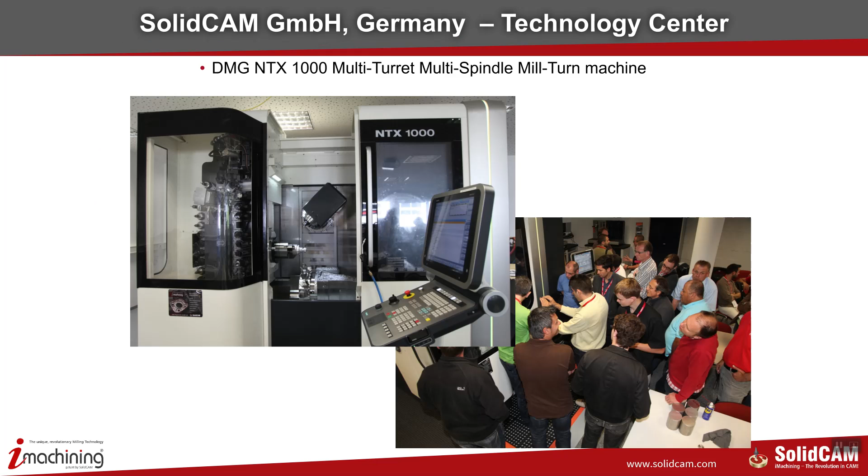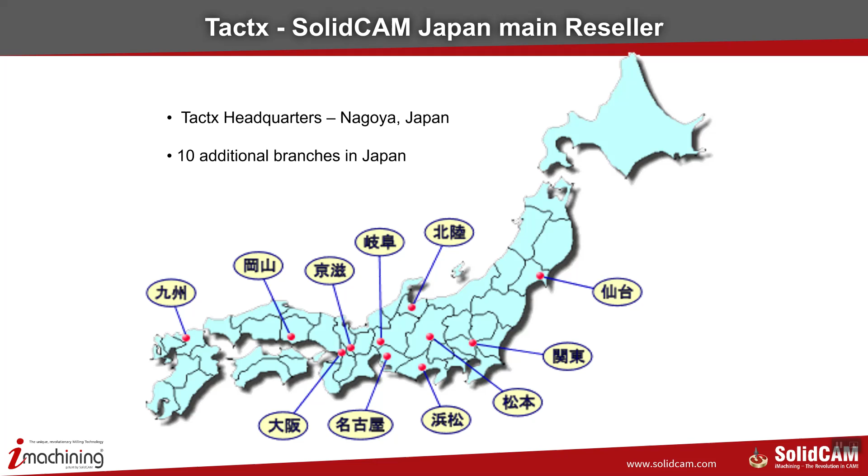Our major distributor in Japan, Tactx, has their headquarters in Nagoya, Japan. They have 10 additional branches in Japan, you see them here on the map. Tactx also has a technical center in Gifu.

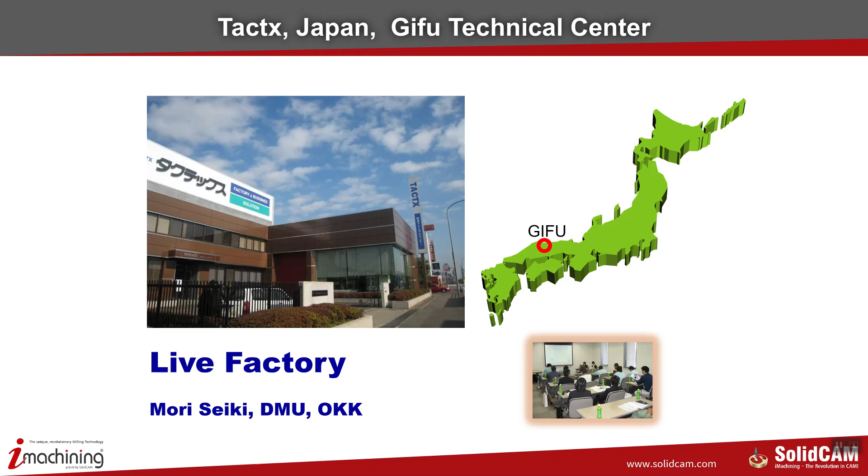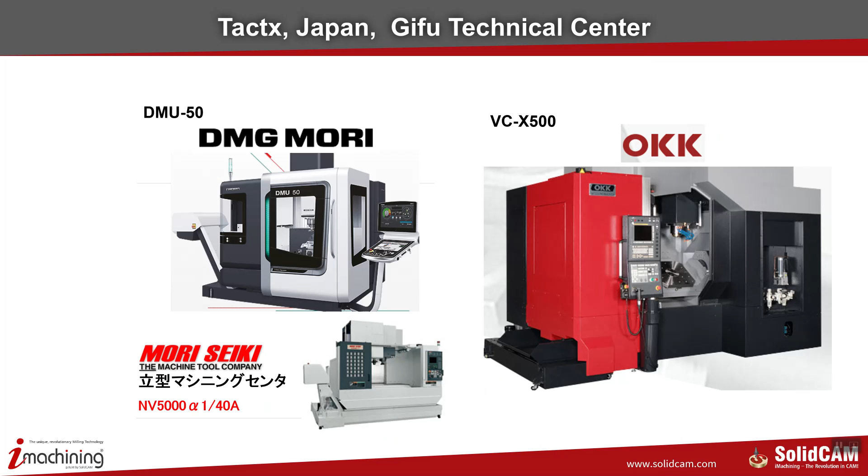Let's see the machines they have. They have a DMG Mori DMU50, a Mori Seiki NV5000, and an OKK VCX500.

All these centers with technology CNC machines are able to teach CAD/CAM and technology to all potential customers, and the machines can also be used for benchmarks and for creating examples to show the different types of cuts. So it's a very good capability to have your own machines to demonstrate and check your capabilities.

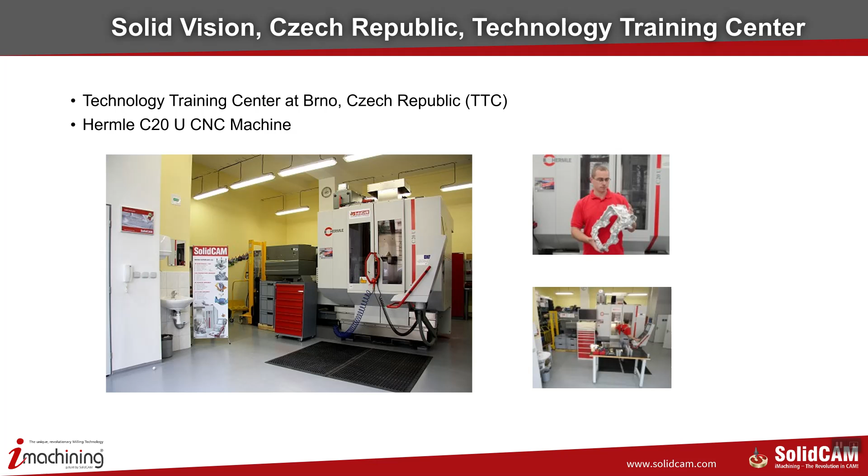Now that we've got an overview of the company, let's look now at our newest product. It was released a couple of weeks ago: SolidCAM 2018. I will try to go through the main highlights of the product.

Let's start first with very nice changes in the user interface and automation. We now have a very beautiful capability called drag and drop.

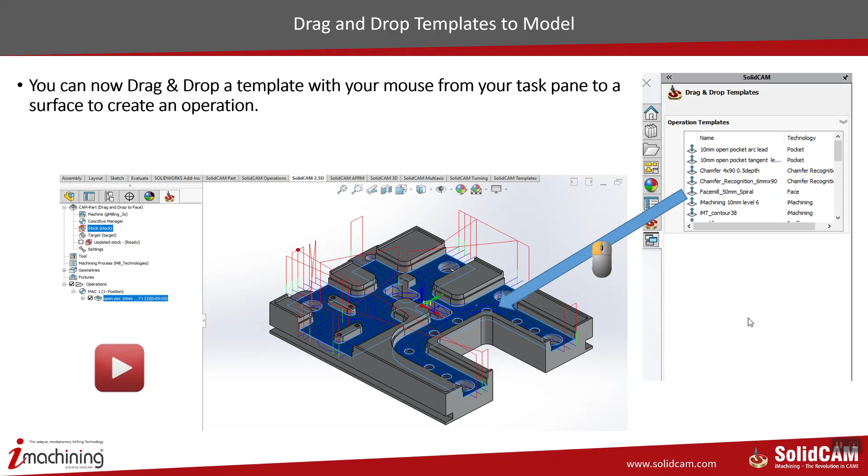You see here, on the right, a task pane with a list of operation templates, and the user can use a mouse to drag one of these templates onto a surface in the model, and automatically this operation will be activated on this geometry. You'll see it soon shown by Sid.

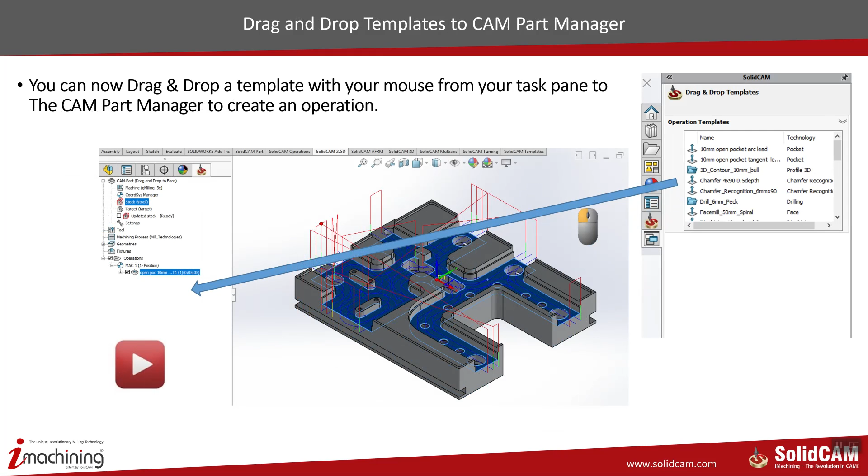We can also drag and drop the template not only to the model but directly to the CAM part manager. The same thing that we do with regular templates - you see here on the right, in the task pane, templates are on top, and process templates are on the bottom.

So the same thing that we can do drag and drop with operation templates, we could do with the process templates. We could drag the process templates either to a surface in the model or directly to the CAM manager.

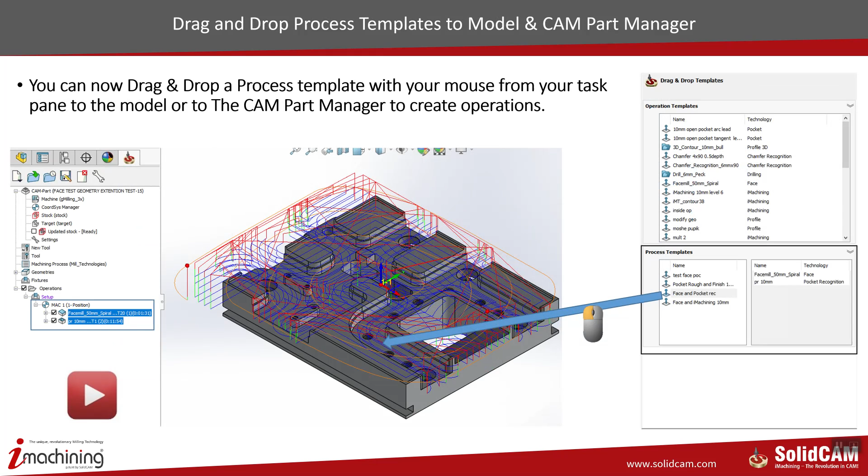And the last of these capabilities, and the most powerful, is that you can now drag and drop an existing operation onto the part to create new operations. This is really beautiful, and Sydney is going to show it. This capability will be in SP1. Okay, Sydney, go ahead. Thank you very much.

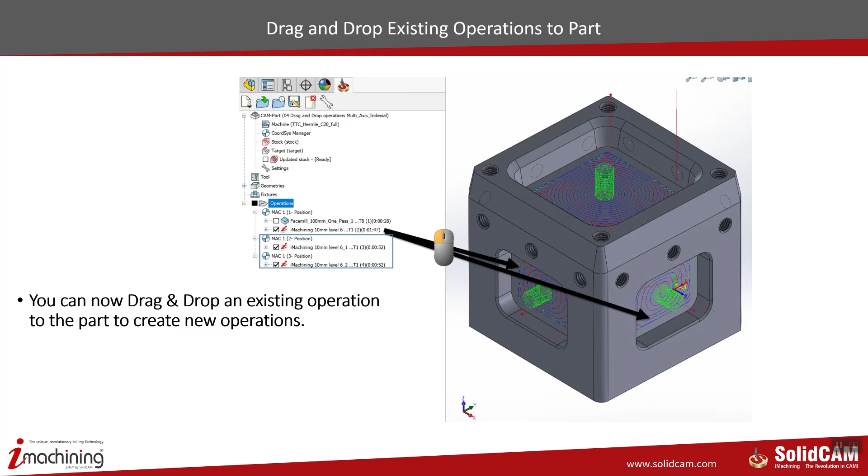As Emil said, we have made major improvements also in our interface, and also made it a lot easier to use, such as the drag and drop, as Emil had mentioned.

As far as the interface goes, we have in our task pane the capabilities of entering our operations or parts directly from the task pane, instead of going into tools, SolidCAM, and then looking for what we need. We have that now in our task pane, as well as in our CAM tree. We also have the capabilities of opening recent parts, save as. All of these improvements were made in our interface at this point.

Now let's get to drag and drop capabilities. If we take a look at our task pane for drag and drop templates, we have operation templates as well as process templates. Let's first start with our operation templates.

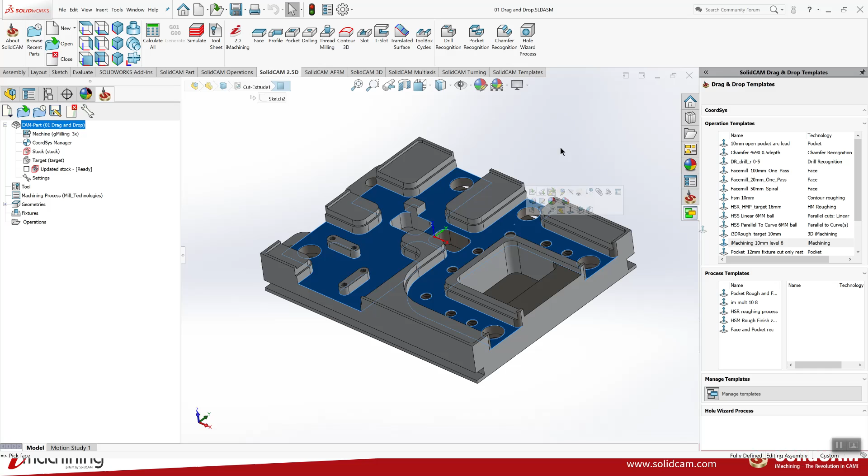Let's say I'd like to put an iMachining operation on this area, on that particular face. What I'll do is take an iMachining operation, say this template I have, and I'm just going to drag it onto that face. The moment I do that, the operation is created, and we have a toolpath automatically created on that face as well. I can do this with a pocket operation too.

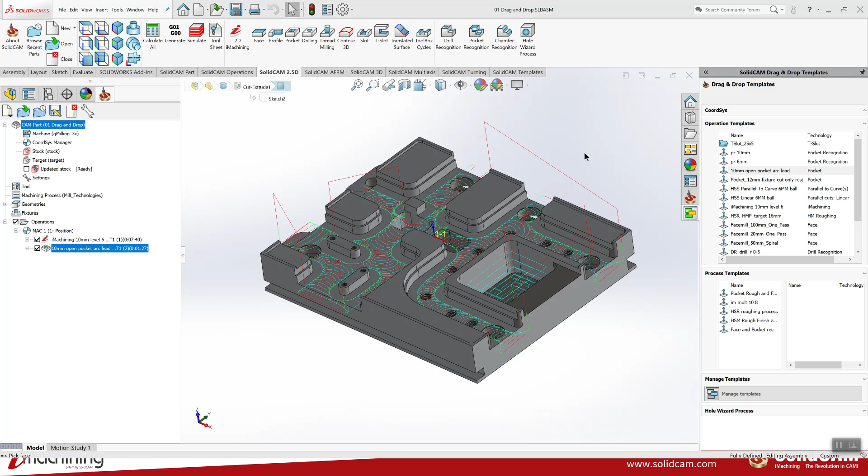Let's take, for example, a pocket operation, and we'll drop it. I can also do this. I'm going to drop it onto this face, and there we have a pocket operation inside there as well. Now I can also do this to these faces over here.

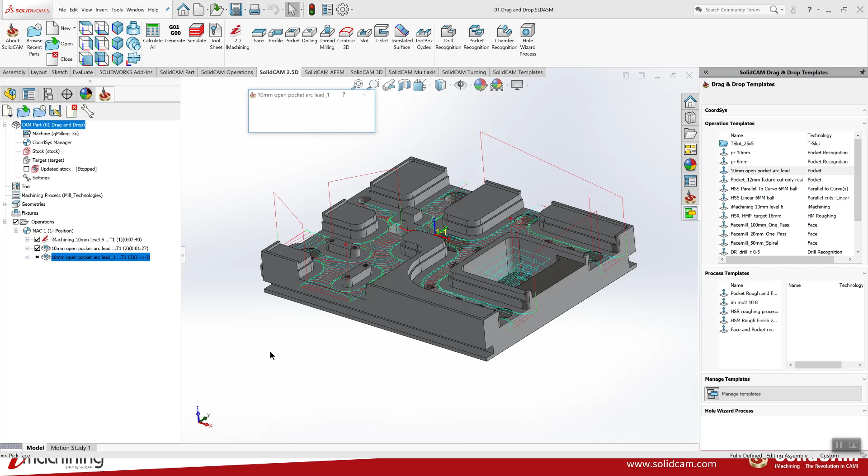Instead of dropping into each one individually, I'd like to have all of these in one operation, not just separate operations. So when I drag and drop an operation to the face, if I hold the control button on my keyboard, let go of my mouse, and while still holding control, click on each of these faces, once I'm done I just let go of the control button, and then we have one operation for all of those faces, as we see here.

Now let's do another operation, such as a face operation. I'm going to do a face mill operation for the top, and you'll see that it puts a face mill operation on top.

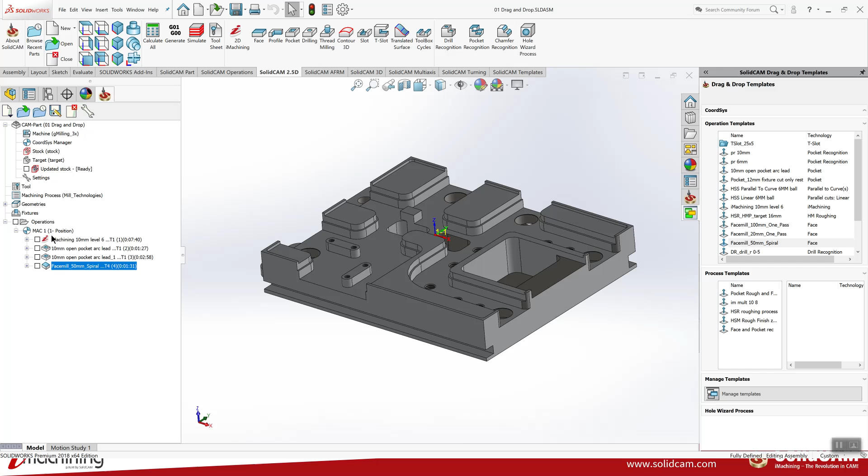Now, I'd like to put one on this face. You see right now I've been working the whole time in MAC 1 position 1. What happens if I drag it to that face over here? It'll create another home position as well as create that operation on that new home position. So we're also creating home positions automatically, as well as putting it in the right position.

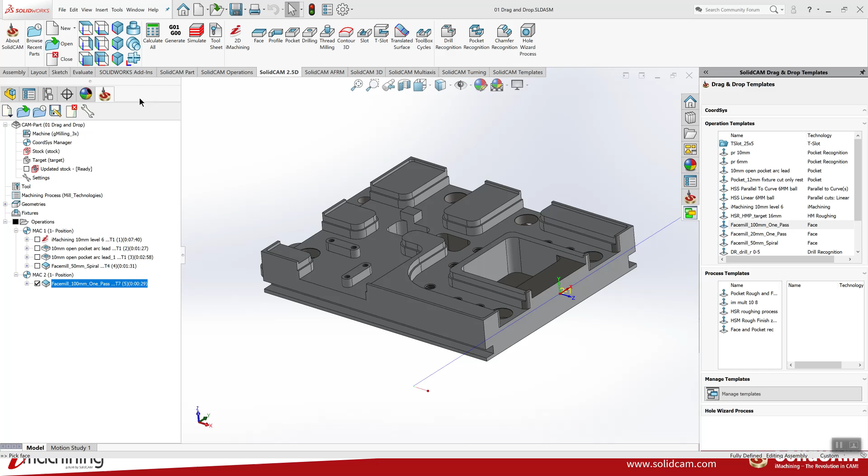Now let's take another part that I'd like to show you, because I also like to demonstrate the use of process templates. Let's say I have a part that looks like this, with many pockets, as you'll see in a moment, and I'd also like to do a face mill operation on top.

As we see here, we also have our process templates, and as we click on each one, you can see what each process template has inside it. For example, I'd like to do a face mill and a pocket recognition on that part — you see I have those two operations there. I'm just going to take this and drag it onto the part itself, and it's going to create that face mill operation as well as the pocket recognition operation for that part. You can see that being built right in front of our eyes.

Okay, now I've shown this on 2.5D operations, but what happens if I have something for 3D? Let me load this part, and let's first start with HSS.

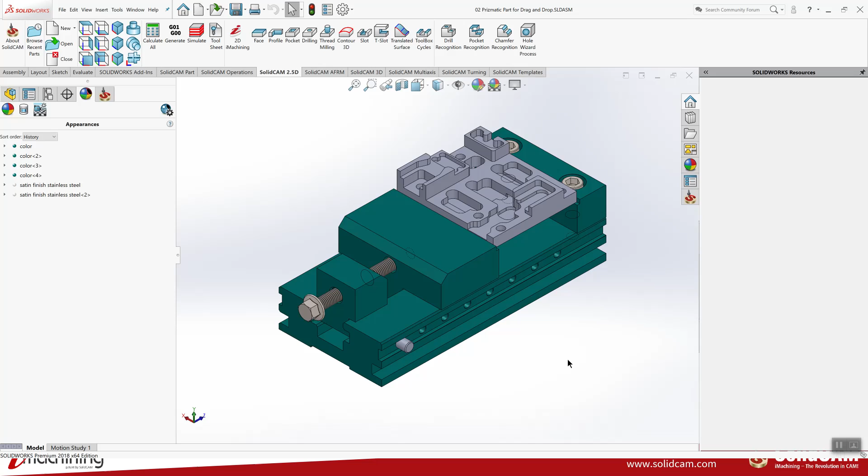Now I like to put an HSS operation on this surface. As we know, when doing HSS on a surface, it can actually go towards several home positions, not just the one going up towards the top. So what happens in that particular case? If I drag and drop an HSS operation here, it'll ask me which home position I'd like to work on, and I can choose from the different home positions I may have. I'm just going to leave it at Mac 1 position 1, and when I accept that, it'll create the operation.

Now, what if I use an operation for HSS that has more than one element needed for the geometry, such as a parallel-to-curve operation? I'll just drag that template over there as well.

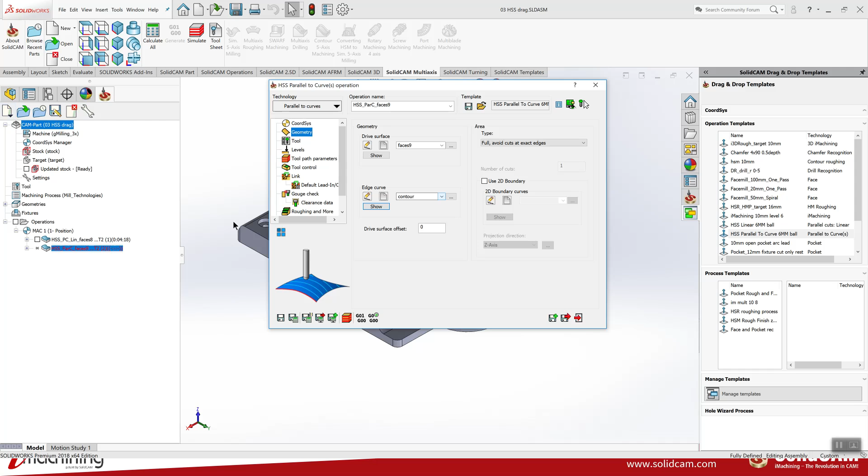So what if I take an operation that has more than one element, such as the geometry of the face, and I need an element for parallel to curve? So when I drag and drop that particular operation, again, it asks me which home position. I'll click on OK. It'll create the operation and open up the operation as well. So this way I can just add the geometry that's needed, which is a particular line, such as this one over here. And all I have to do now is just calculate, and I have that operation as well.

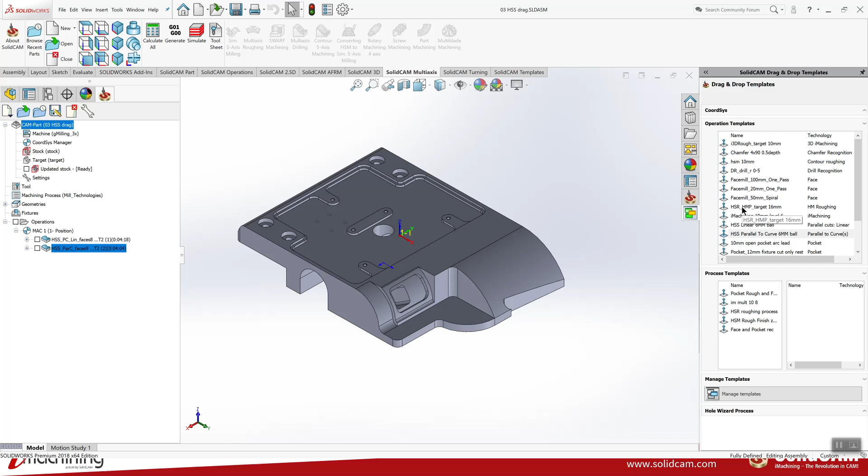Now, as I said, we do this not only for HSS, we also have this for iMachining 3D as well as HSM. Let's just show this for HSM. If I were to take an HSM operation and drag that to the part, it'll create the operation, calculate everything, and there we have everything done in one simple drag and drop according to the template.

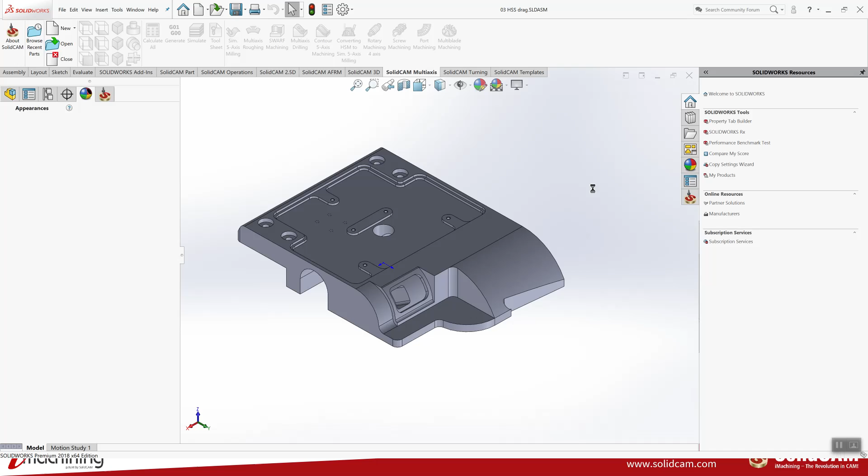Now, let me load a different part. And this one is actually one of the newest features I've added inside SolidCAM. And as Emil had mentioned, this is called drag and drop operation. This will be available in SolidCAM 2018 SP1. Now, let's go away from the templates for now. I don't want to even look at the templates now.

I have here two operations actually, and you can see the iMachining operation is on that top pocket over here. And if I were to go into my coordinate system manager, you also will see I only have one home position. Now, what I'd like to do is take this operation and have it on this pocket as well, also on this pocket. So what can I do?

I can actually take the operation itself, drag it to that surface, and it'll create the operation over here. And I can also take that and drag it to this surface over here as well. And it'll create the operation over there as well. Okay.

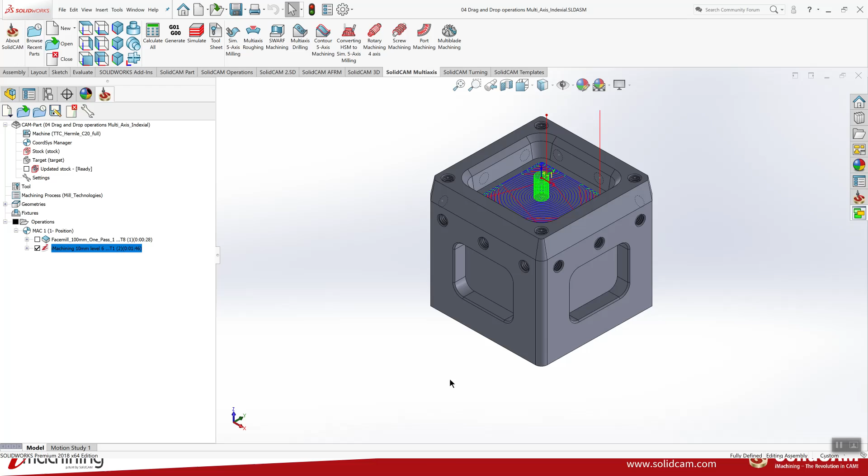But the thing that I want to mention is as a result of having this optimized geometry database, we have a major increase in performance in opening and closing medium to large files, in feature recognition, in saving of compounds, in finding a large number of holes on faces or sketches, and in building chains on faces and sketches. All these features have been sped up tremendously due to optimized geometry. Let me show an example. Sure, no problem.

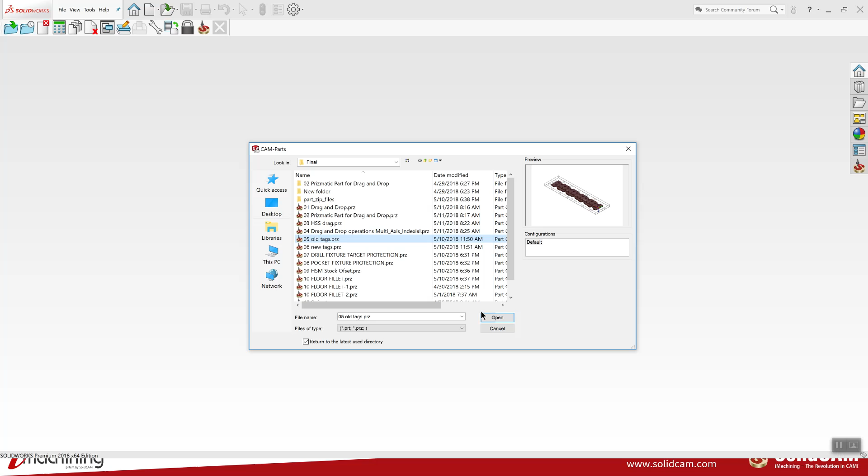Okay, let me close this part. And the first thing I'm going to do is open up a part that has the traditional way of creating the geometries that were done on it beforehand. And what I'd like to do is the following. I'm going to take someone, Beck here, for example. Please look at your watch. And when I say go, start taking the time and tell me how long it's going to take to actually open this part. And we'll start right now.

And it's going on. This will take some time. This is the classical way, the previous way that we used to create parts. I'm not going to go technically into exactly what's going on over here, but as you'll see in a few moments, this part has many faces to it. And it would always take a long time to open up those faces, open up all the geometries involved. And as you can see, already we're at about 45 seconds. Is that right, Beck?

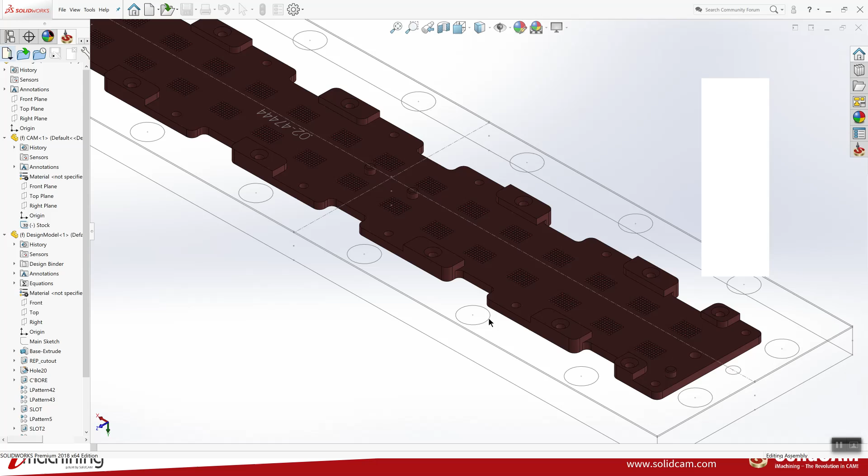Yes, you're right, Sydney. And you'll see that it's going to take a little bit of a while. Now, what I'm going to do when I finish this is also open up the exact same part that was done with the new optimized geometry creation. Okay, right now we're at a minute and 10 seconds. And don't worry, it won't take too much longer. A minute and 15, still not done, and now we're done. A minute and how long was that, Beck? A minute and 20 seconds. Okay.

Now I'm going to close this part, okay? And closing this part also used to take some time. And when I open the other part, you're going to take time again. Okay, so just a moment, we'll let this close.

Now we'll be opening up the exact same part that we see on the screen, but the part that will be opening now is a part that we had already converted to the new optimized geometries. We'll show this in a moment again.

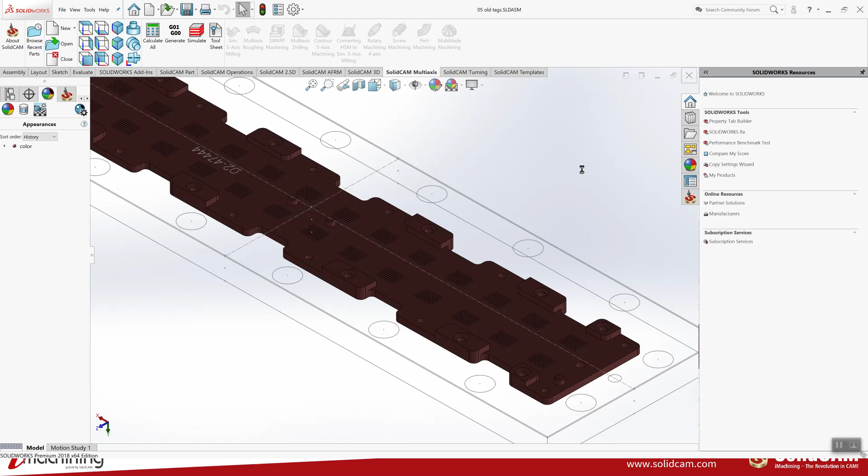This will be a good time if you need to drink something, you can do that too, or take a bite in your apple. Okay, so let me go now. Almost done, it's still closing actually.

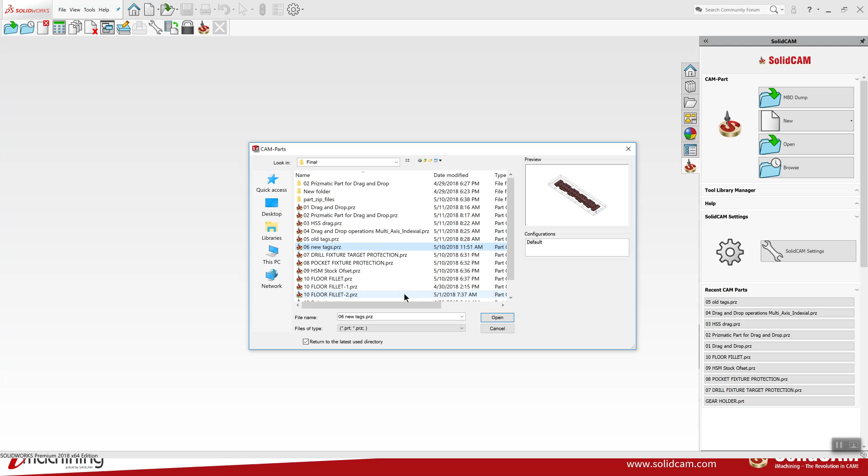Okay. Now I'm going to open up the part again, but this time I'm going to use the new optimized system, okay? And we'll start timing. Becky, you're going to watch again. We'll start now. And as you see, don't blink because this is going to go pretty quickly, I think. And we stop. 10 seconds.

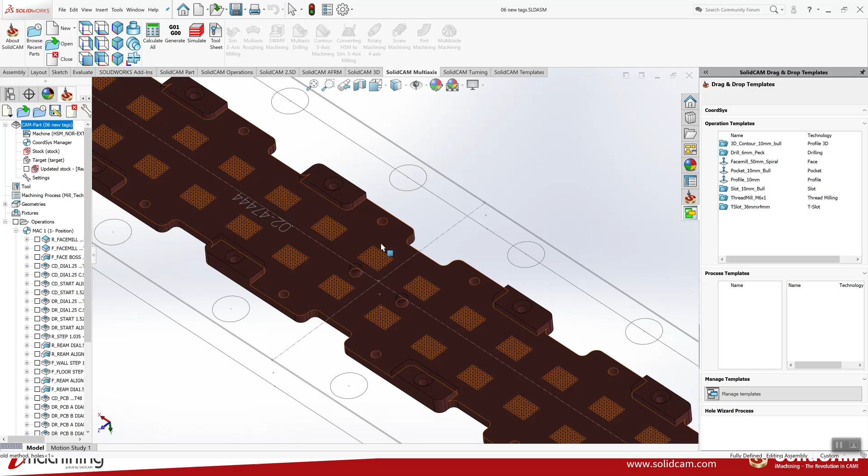Wow, that's a big difference. You can see that this part had all of these holes in it, and still it only took 10 seconds to open up the part. As you can see also now I'm closing the part, you can see how quickly the part closed as well.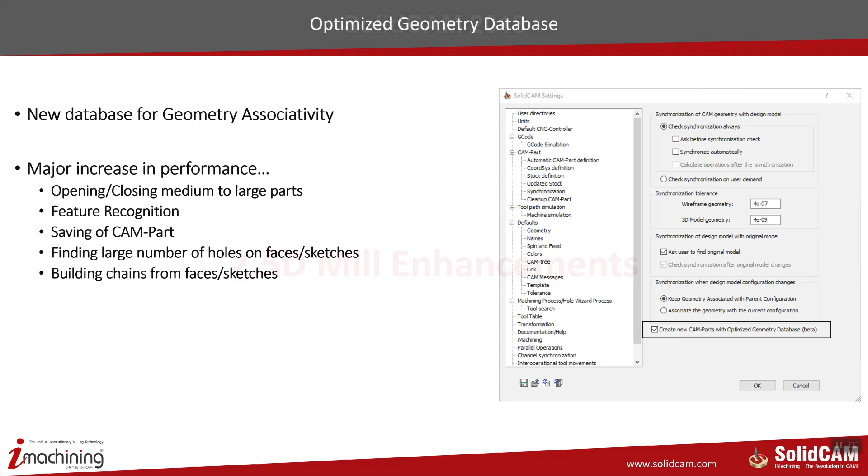Okay, now after the beautiful new optimized geometry database, let's go to see what is new in SolidCAM 2018 regarding 2.5D. Actually, we added something that people have been asking for as long as I remember, that our milling tool should take care not to hit the fixture. And we have done it. Finally, we have done it.

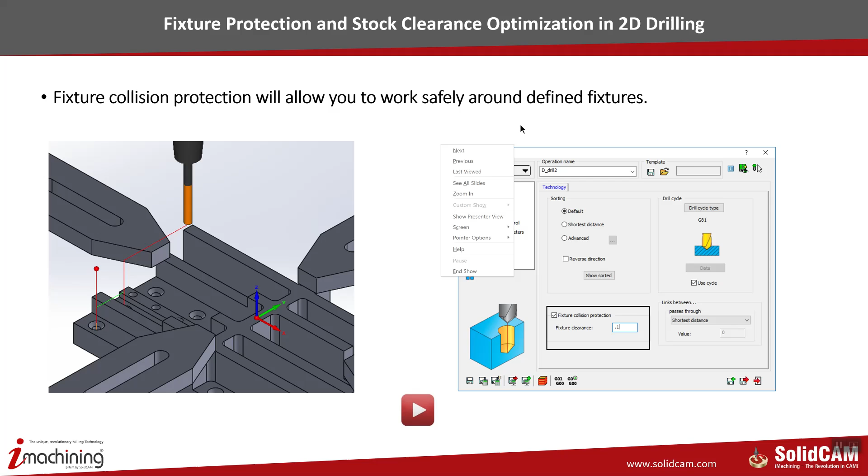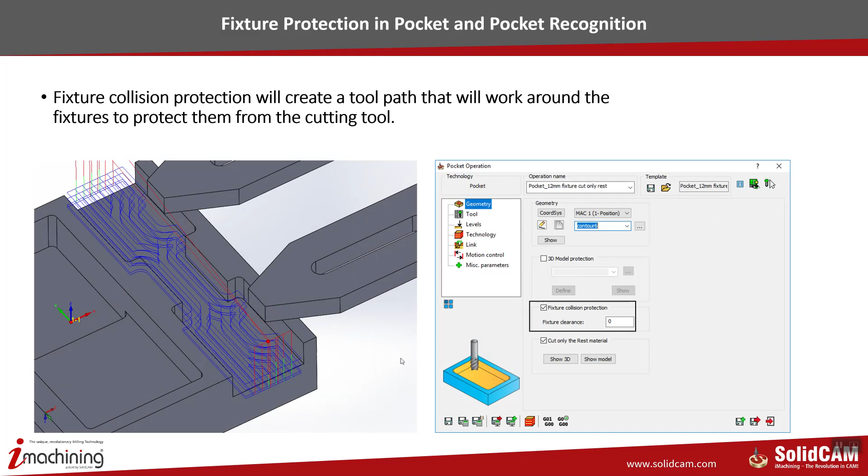Fixture collision protection will allow you to safely cut around defined fixtures. And this is available in 2D drilling, the profile, also in pocket and pocket recognition. And we've added also a nice option, cut only the rest material. And this is active in both pocket and pocket recognition. With cut only the rest material, you can use the same geometry from a previous operation, and the tool will only cut the areas that have material left to cut.

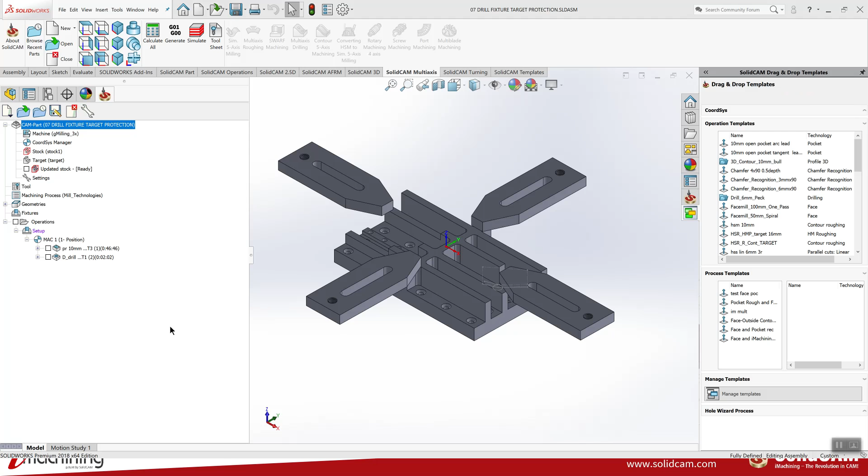And let's first start with what Emil mentioned, what we have in our drilling operation. Now, in our drilling operation, I'm not going to actually create the operations. I've already done that, but I'll show you exactly what we've done here. First of all, let me just show you that I've already machined away all this material in this area over here. I'll do a quick simulation just to show you that. All the material that we had around over here was milled away already. So the stock right now is actually all the way down to these areas over here.

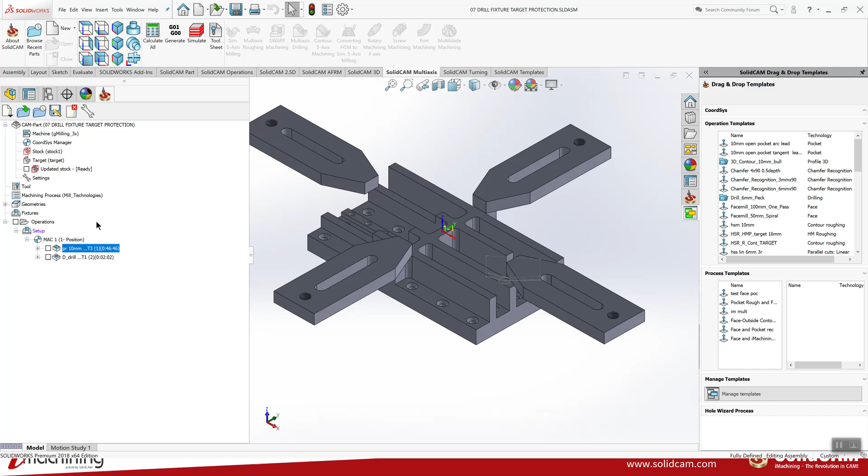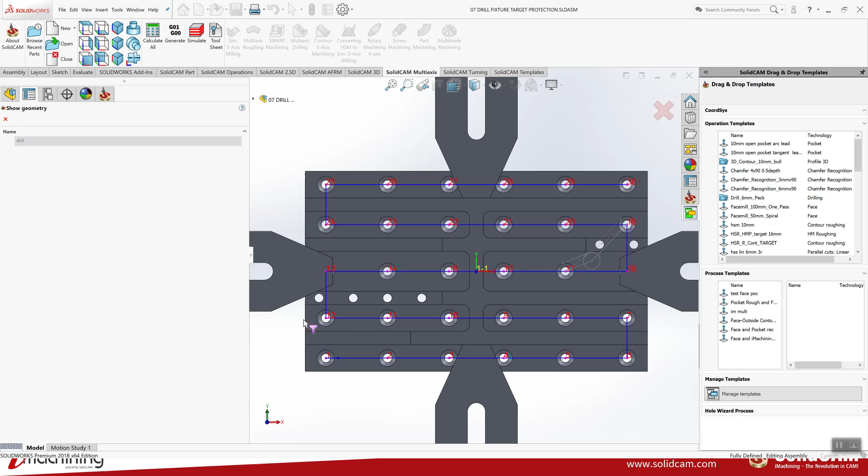It's important because what I would like to show you now is the following. When I open up my drilling operation, let me first show you my actual geometry. My geometry includes all of these holes. As you can see, these holes are very close to the clamps. It also has holes that are underneath these clamps, and it has walls in between these holes over here. Okay. Of course, I've defined my tool.

Now, if I go into my levels, the first thing we've added over here is you'll note that my upper level says automatic or auto. This is because the upper level will be going according to what the updated stock was. So since I already machined the pocket, all these areas all the way down to there, the upper level in these cases will start from here.

Now, if I go into my technology, as Emil had mentioned, we've added fixture collision protection. And we've also added the field of fixture clearance as well, so I can make sure it doesn't get that close to the fixture. We all know with clamps, sometimes, I'm not gonna go, it's too technical, sorry. We also added another option of shortest distance, to have the tool path go its shortest distance between one hole to the next.

Let's take a look at the simulation. I'll use the SolidVerify, and let's do this one step at a time. You'll see it'll go down to that surface over there, start drilling over here. When it comes up, it'll go directly to the next hole without going to the clearance level. Drill that hole. Now it jumps above the clamp, goes to that hole, stays down to that hole.

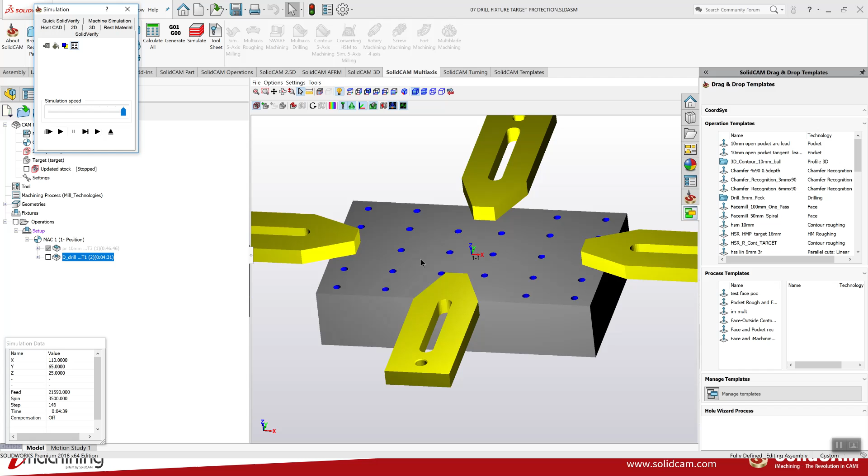If we take a look now at the simulation, you'll see that the drilling now starts from the very top instead of going down every single time. Still jumping over the clamps, but this time it starts from the very top on each one of those. So that's where the automatic upper level goes from.

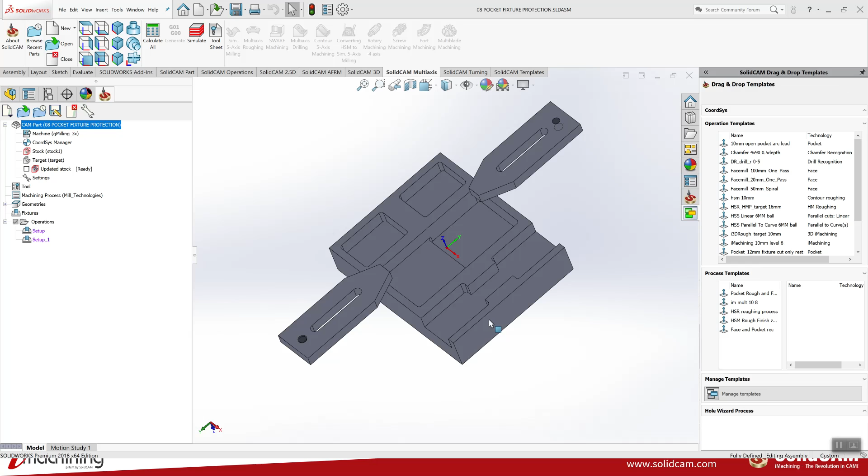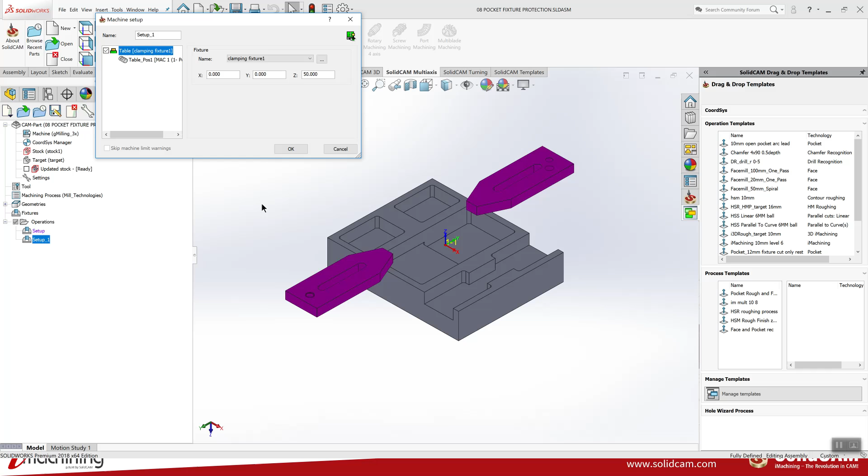Now let's open up a different part. And we'll show this happening in a pocket operation as well. We'll show the option of rest material and, of course, the issue of fixture clearance. Okay, if we take a look, I have here two different setups. My first setup has clamps over here. And my second setup has clamps on this side over here. Okay.

So what I'd like to do is create a pocket operation in this area over here. So let me go into my 2.5D operation. Just one of a few times I'll actually be creating an operation. And first of all, I'm going to create my geometry. Let's do this very quickly on that face. And we have here fixture collision protection, as well as the option of cut only the rest material.

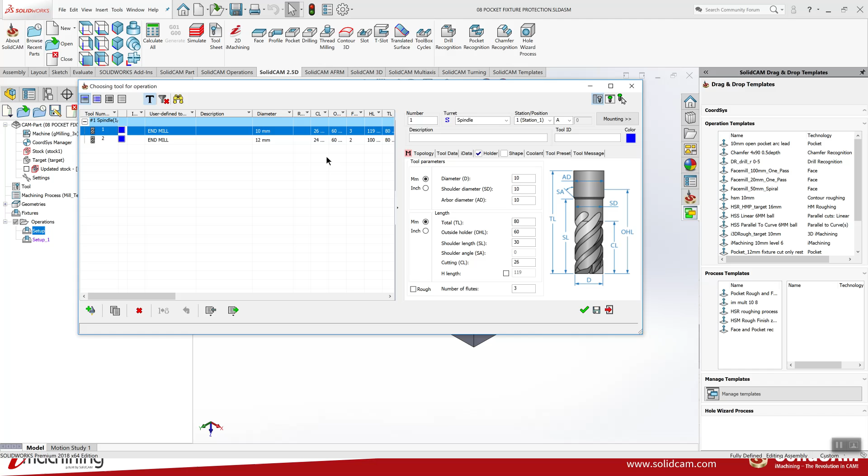Okay, I'll just quickly add a tool. Okay, and I'll just make sure my technology is correct. Of course, I could have used a template as well. Let me just calculate. And as you can see, this area where I had the clamps was not machined, because that was done in my first setup.

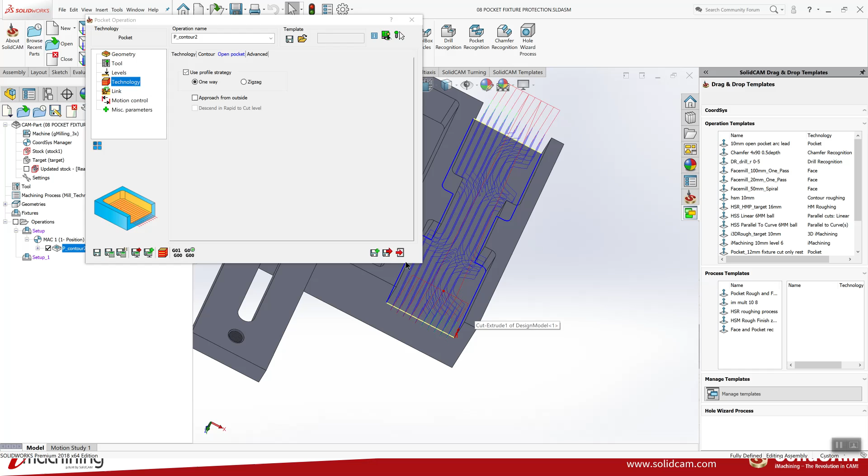Now, what happens if I were to copy that operation? Just do a simple copy and go to the next setup and just paste it there. No changes were made in the operation, and all I'm going to do is just calculate that operation. What you're going to see is as follows.

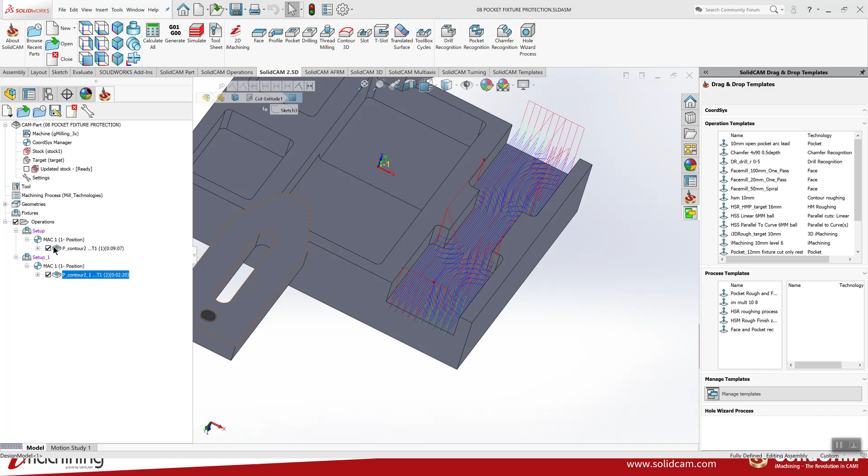It's only going to work in the areas where the previous operation could not machine because there was a clamp there. Now in this setup, there's no clamps there. It machined only in that area. And that's what the rest material does. Okay.

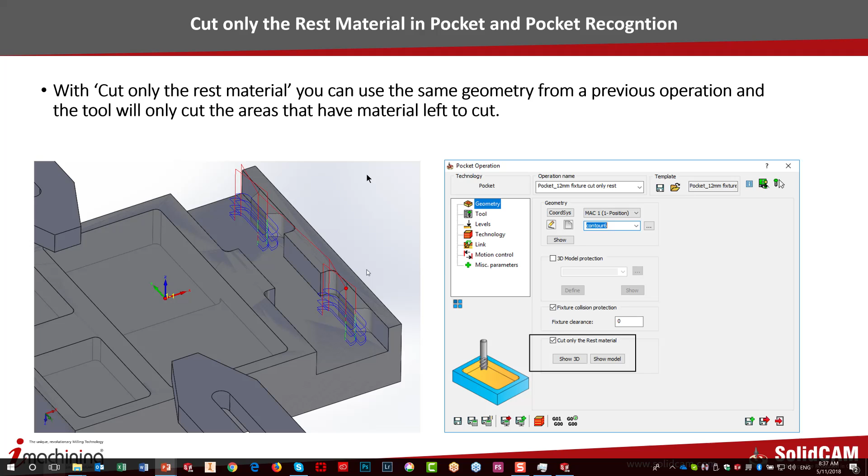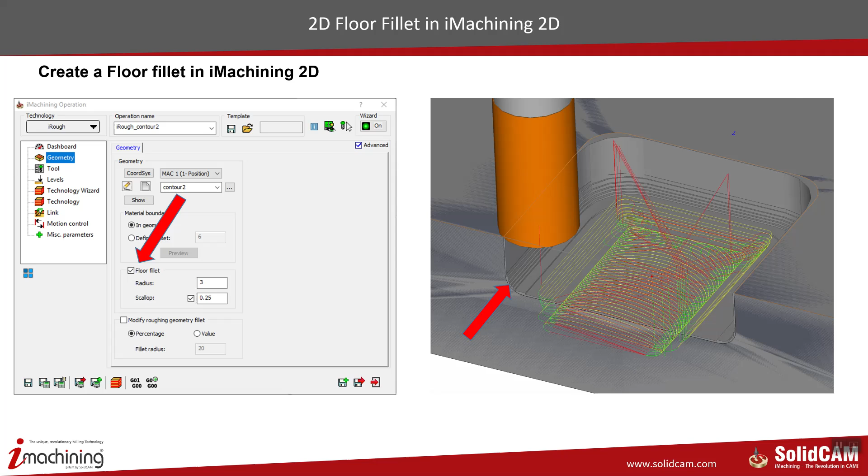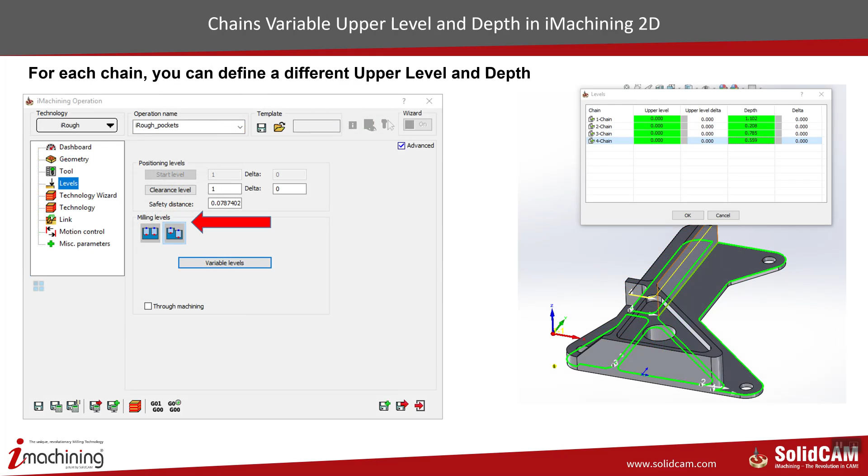Okay, thanks. Next, we go to a few nice changes in our major technology items. We have added the possibility to create floor fillet in iMachining 2D. A very nice feature Sydney is going to show. Looks a little different. Also, when there are multiple chains, we have added the capability for each chain to define a different upper level and depth. This is quite useful.

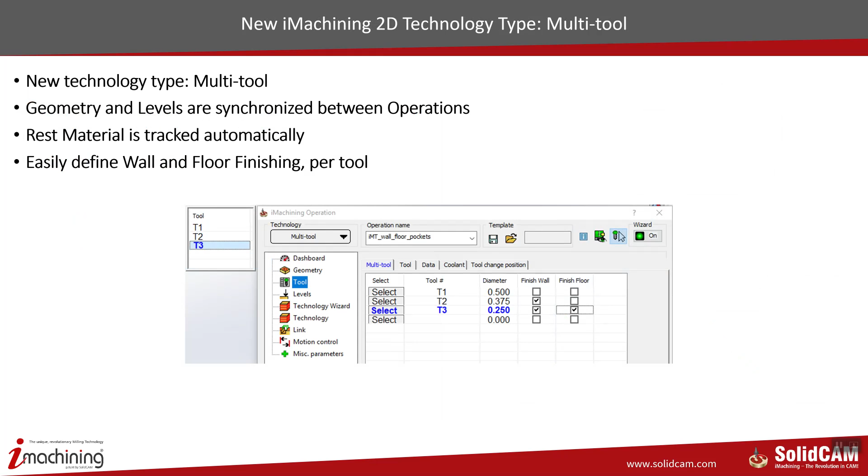And the major thing we added in this version is the multi-tool. Till now, there was never a possibility inside SolidCAM to define more than one tool in one operation. Now this technology type, multi-tool, breaks this rule. Here we can define several tools in the same operation. And the geometry levels will be synchronized between the operations. The rest material is tracked automatically, and you can easily define wall and floor finishing per tool. Also, this multi-tool works in iMachining 2D and also in iMachining 3D.

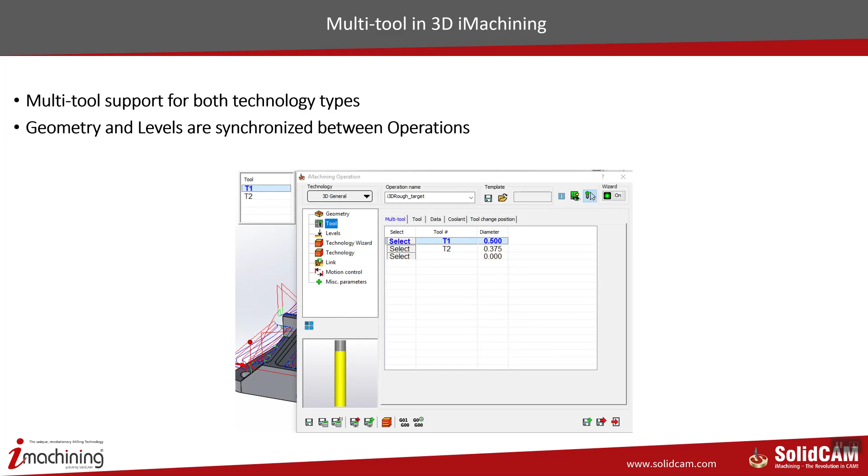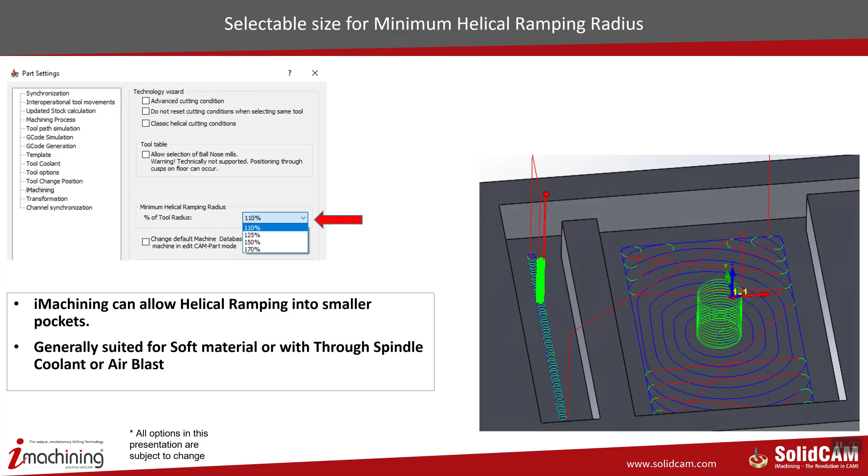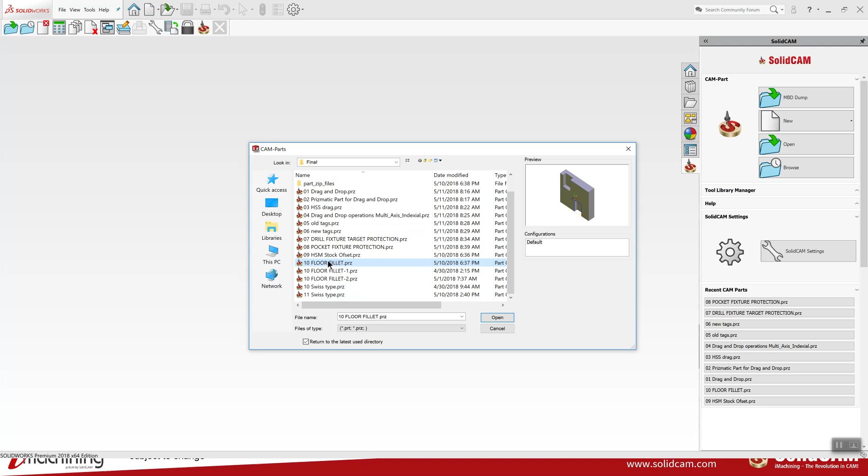Sure, no problem. Okay. Let me open up a new part. Okay. We're going to show this very simply. I took a simple part. You can actually see the radius here that we have. I have here right now a 3 millimeter radius.

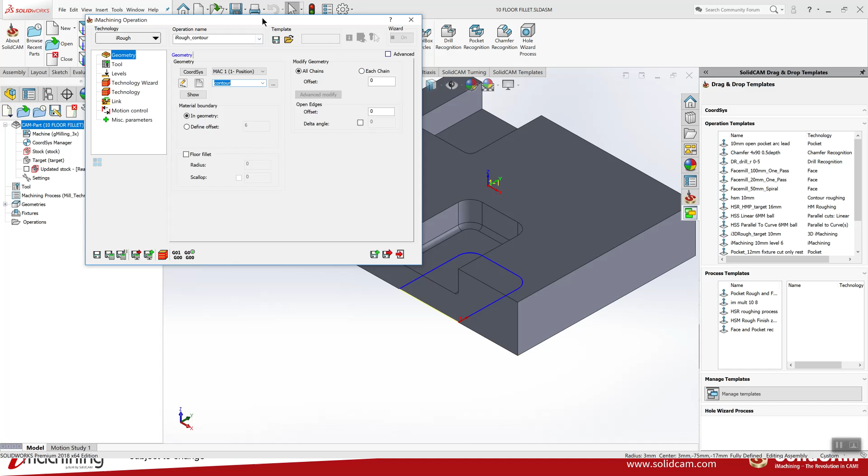Now, if I were to go into my iMachining operation, let's go into iMachining 2D. I already have a geometry that I'm going to be using, this one over here. And if we take a look further down, we have here an option called floor fillet. If I were to use that, we have the radius of 3 millimeters, and I can control the size of the steps by scallops. So let's put a scallop of, let's say, 0.2 millimeters.

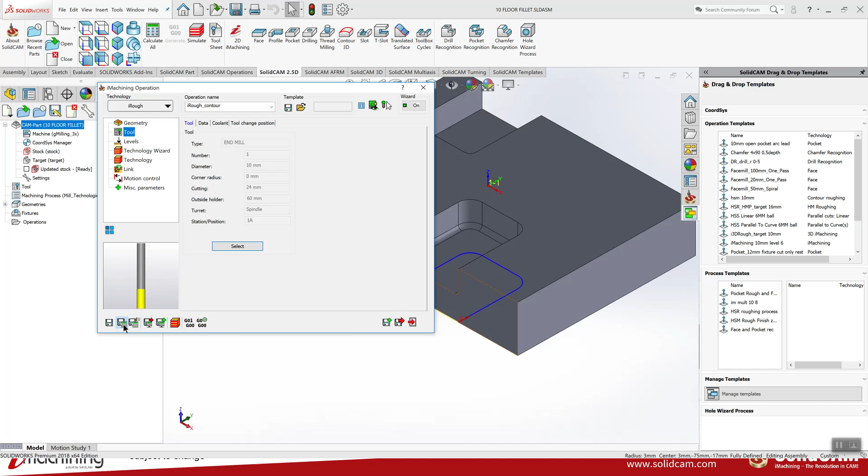I'll quickly add an end mill. And I'm just going to do save and calculate. What you'll see is very simple.

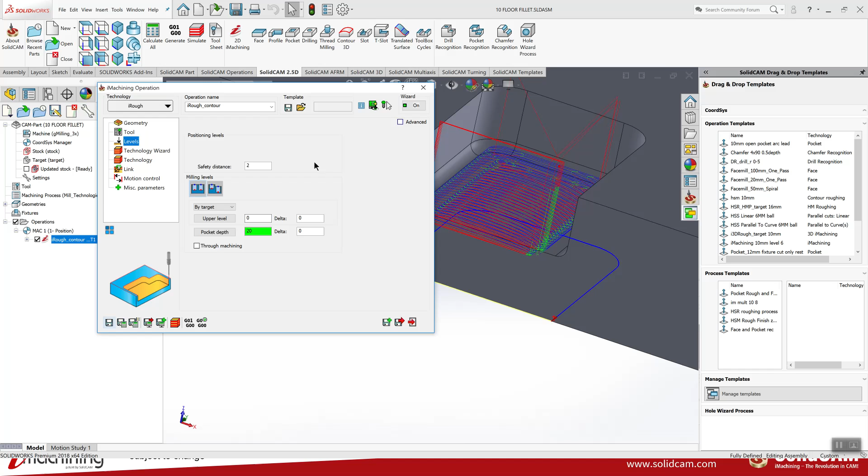My little mistake, I forgot to put the levels in. We're going up to there. I'm only human. Okay. What you see is as follows. If we take a look at the toolpath, you can actually see the radius being formed over here by the toolpath. Now let's go into another operation, and I'd like to work on this area over here.

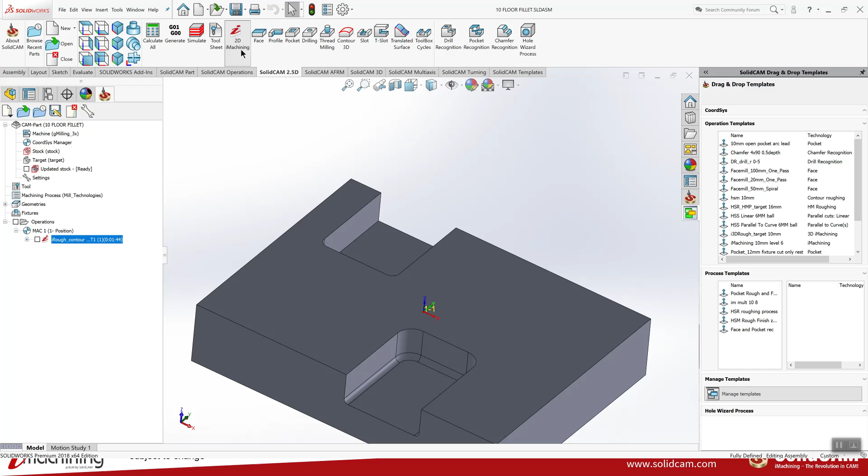And I'd like to do 3 separate operations of iMachining on this pocket over here. So first, let's go into iMachining 2D. And if you take a look at our technology, right now it says iRough. If I were to open that up, we have here now the option of multi-tool. When I do that, it'll allow me actually to use several tools.

First, let me add a geometry. The geometry is going to be, as I said, that area over there. And when I go into my tools area, you can see now we have an option of adding different tools. I'm going to select my first tool. My first tool, say, is going to be a 16 millimeter end mill.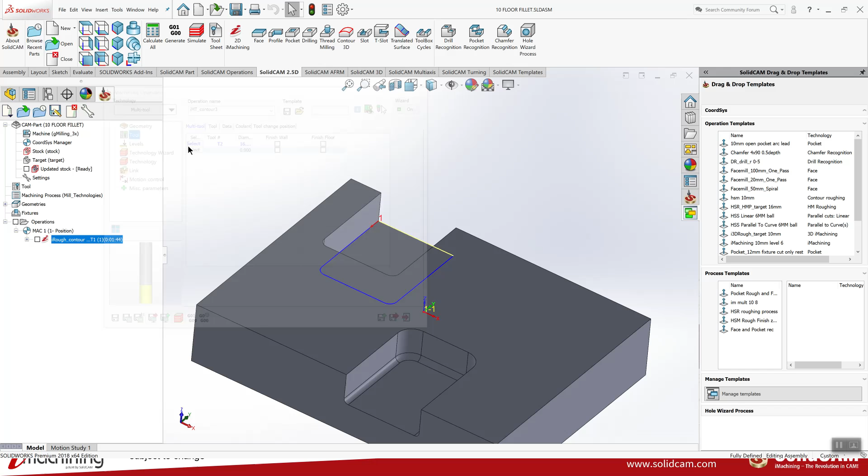And in this particular case, I just wanted to do a finish. I'm not going to check off finish wall or finish floor. You can do that right here, but for this tool, I'm not going to do that. My next tool, I'm going to be using, say, a 10 millimeter end mill. And with that I'll be doing my wall finish.

Now I can add a third tool, and I'm going to use an 8 millimeter end mill. And with that tool, I'm going to do a floor finish as well. And you can see that with each one of these tools, I have them listed over here. And I can see the information for each one of these tools as I click on those tools.

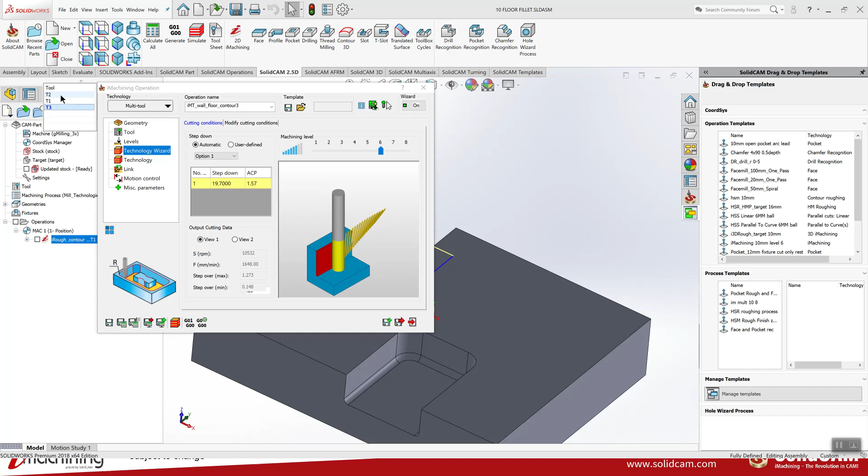And if I go to my technology wizard, you can see each tool has its own settings for the wizard. As well as my technology, you can see my first operation. You can see all of the options that we have. First operation, only roughing, and then later on we have our finishing operations.

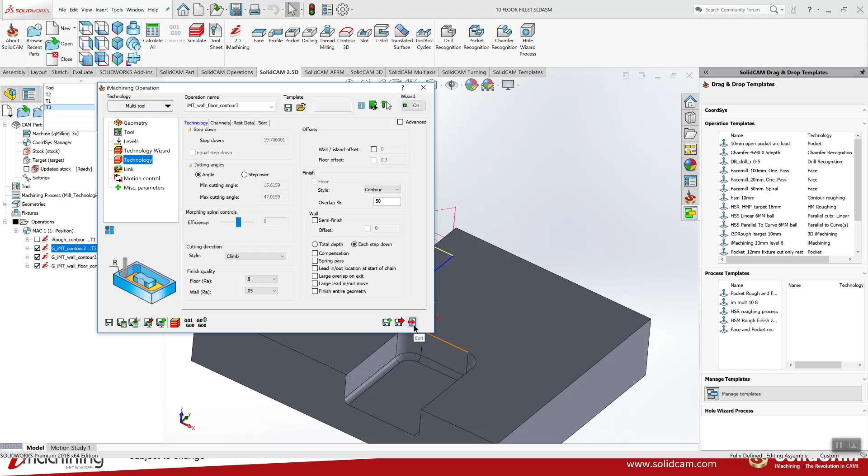Now when I do save and calculate, you'll see that we have 3 separate operations that were created within one operation. So within one operation, we use 3 different tools, and 3 operations were created from that one point. By the way, this is also true for iMachining 3D.

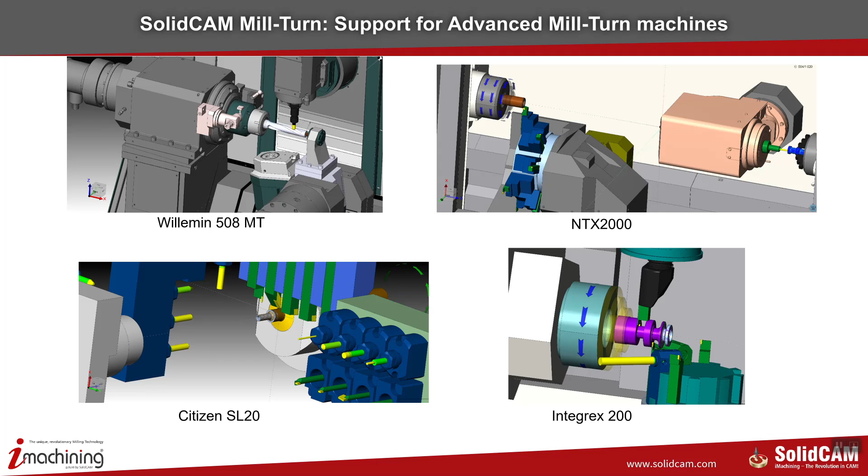You see here on the screen examples of machines that we can now support: Willemin 508 MT, NTX 2000, Citizen SL20, that's the Swiss type, Integrex 200. So, Sydney, show us just quickly an example of a mill-turn part, an advanced mill-turn part. Okay, in fact, I'm going to show it to you on a Swiss type machine. I'm going to show you the simulation on a Swiss type machine. Okay, so let's open up the part.

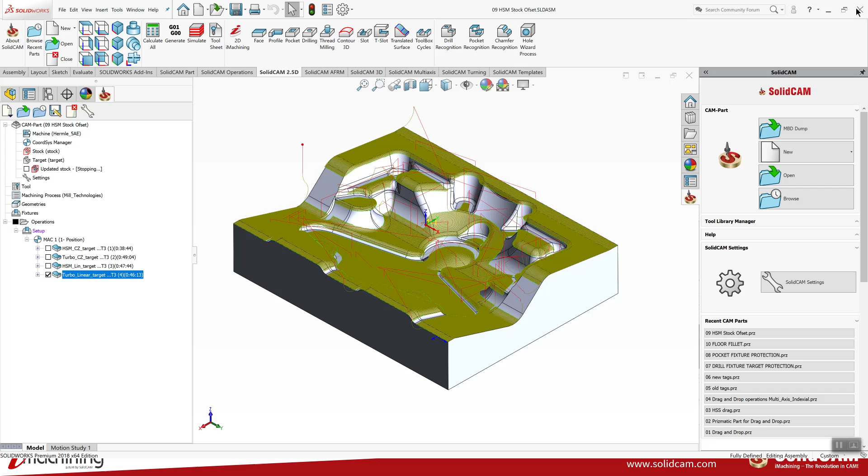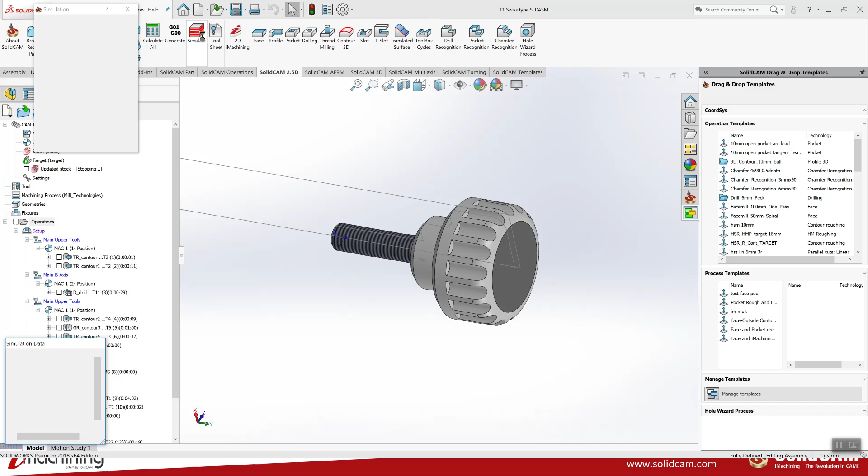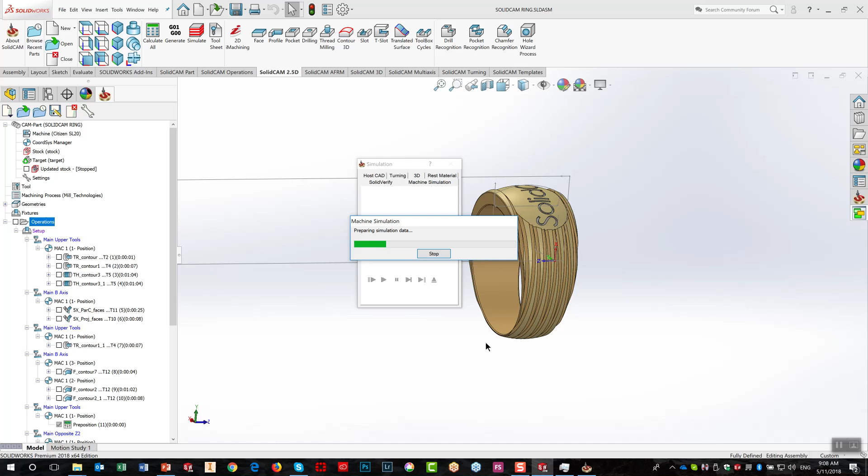Okay. What I'd like to do is actually show machine simulation of this part on a Swiss type machine. In this particular case, this is a Citizen SL20. So let me go into simulate, and I'm going to use the machine simulation. Okay, let's put this off to the side.

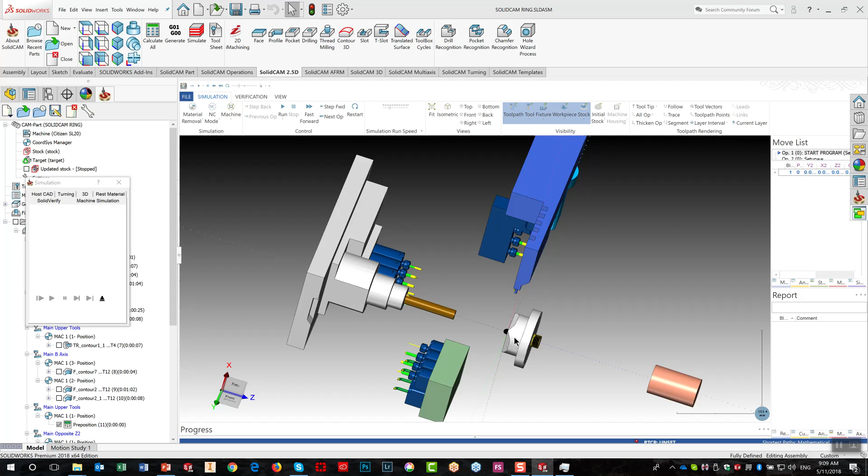And as we see on this machine, we have our two spindles. We have our front and back spindle, as well as all the different turrets we have over here. We have this over here, this one down over there, this one on top, these over here, as well as tools on this side over here. So it's a pretty complex machine when it comes down to it. Pretty complex Swiss type machine.

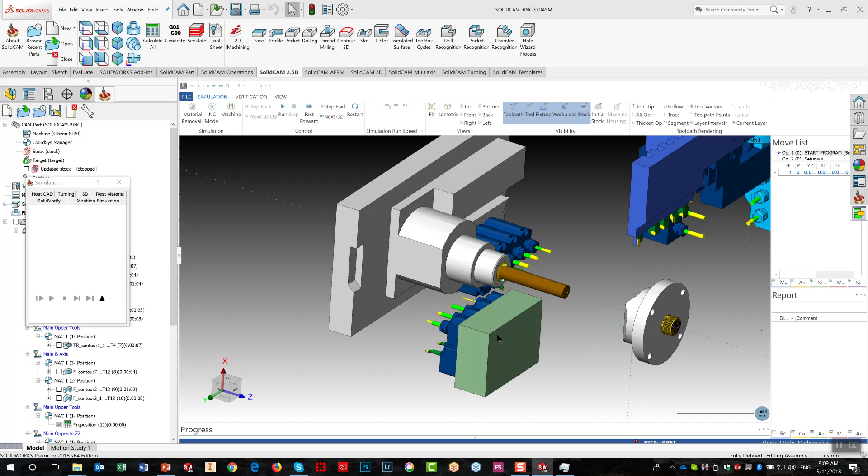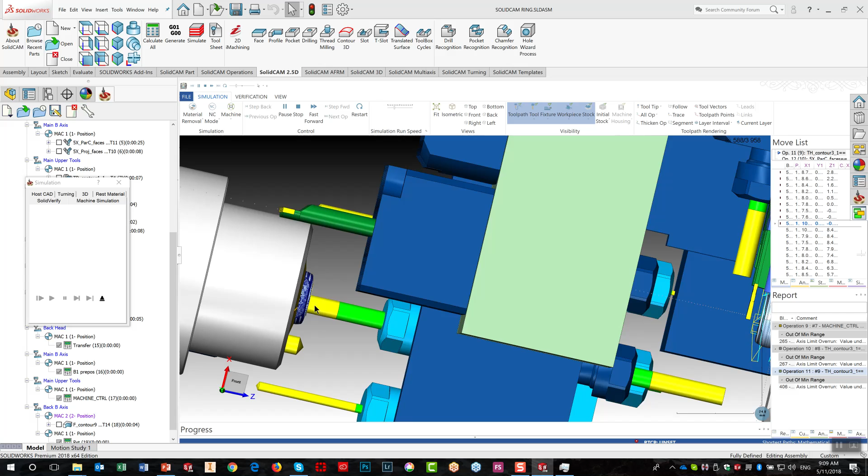So let's take a look actually at the simulation itself, and we'll start. And as you can see, right now it's working in this area over here. You can see actually the material going in and out the whole time, whereas the tools are standing still. But you can also see that we're also working on this other side as well. So we're working on both at the same time.

You can see the turrets now working in the background, everything working, moving back and forth on the parts, creating this part on the Swiss type. This is one of the more complex machines that we actually support, and we support it very nicely inside of SolidCAM. Oh, okay.